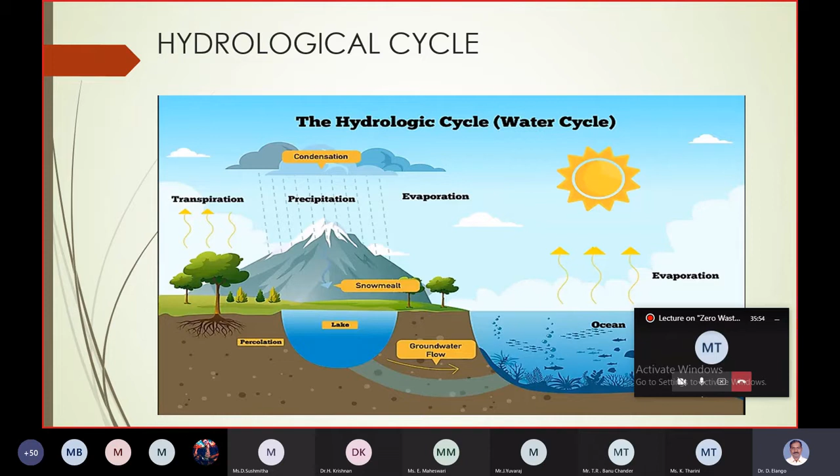But here I am going to take it as solid waste and also rainwater. In the previous slide we saw the global system, how the ecosystem is maintained globally. Now we are going to narrow down, straight away related to today's presentation - how we are going to maintain zero waste management on the household side.

Nowadays in apartments, if you go for CMDA approval for any apartment, if you construct more than 10 dwelling units or the building height is more than 10 meters, this arrangement must be provided. If this type of arrangement is not provided in the particular space, they will not give the approval.

So what is that particular arrangement? If your dwelling unit is a residential area or apartment space, definitely a large amount of solid waste will be generated - that's one stage. Secondarily, liquid waste, called wastewater, will also be generated. But this wastewater is not as highly polluted compared to industry and other sources, so you can reuse this wastewater as well as the solid waste.

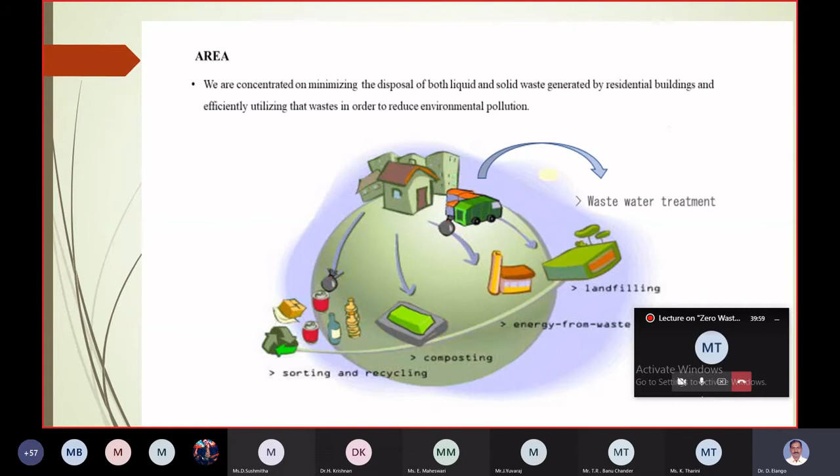Now I come back to our focused area: how residential areas, especially apartments, can achieve zero waste management. Initially I told you I'm going to focus on solid waste.

Solid waste is a material that arises from human activity - an unwanted or discarded material. For example, take a milk packet. After using the milk, the packet is wasted and discarded. That is one of the best examples of solid waste.

Right now, in most places in India, as well as in Chennai, there is open dumping - they simply throw the solid waste in open dumping areas. This was the scenario a few years ago. Now the CMDA is not permitting this type of open dumping, especially for new projects.

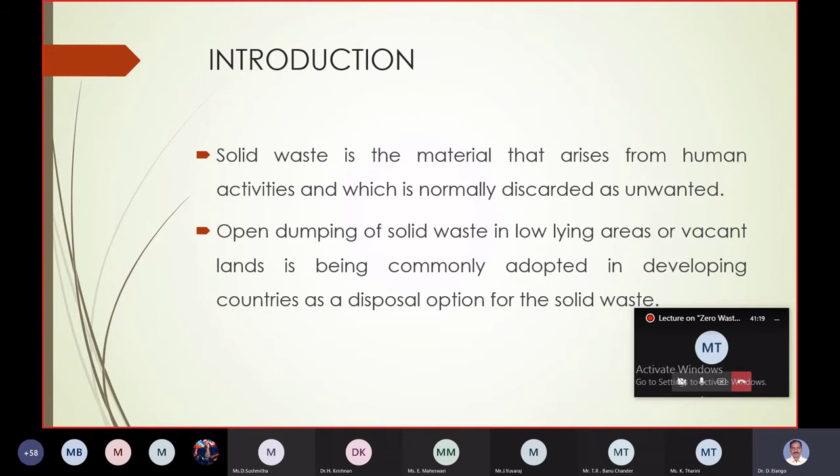Whoever is responsible for developing a project is responsible for handling this type of waste. So even if you construct any new apartments, they are responsible for controlling solid waste. Inside the apartment campus itself, they put separate places for solid waste treatment, and it is applicable to wastewater also. These two things we are going to discuss today.

What happens is, how we are going to reuse it - what is the criteria? Before you do the reuse, you have to analyze whether it will be possible or not.

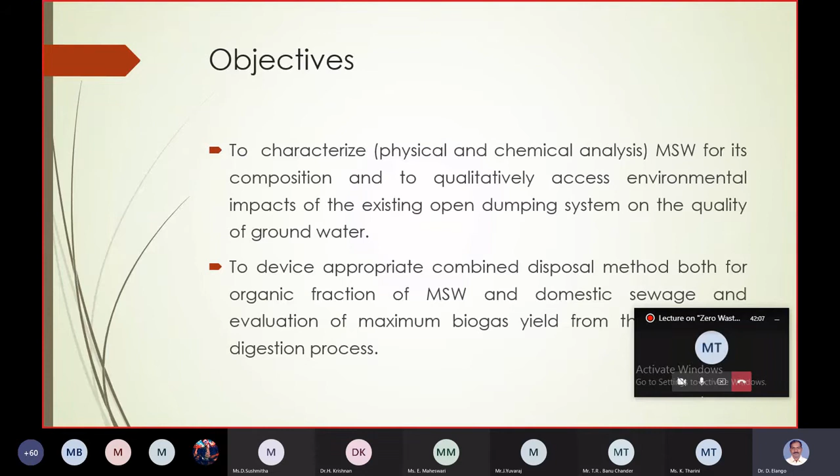The analysis means first you take the solid waste - whether the proper required quantity will be obtained or not, at least a minimum of 100 kg per day. That is the first criterion. The second one is whether the liquid waste can be treated within the campus or not. These things you can find out.

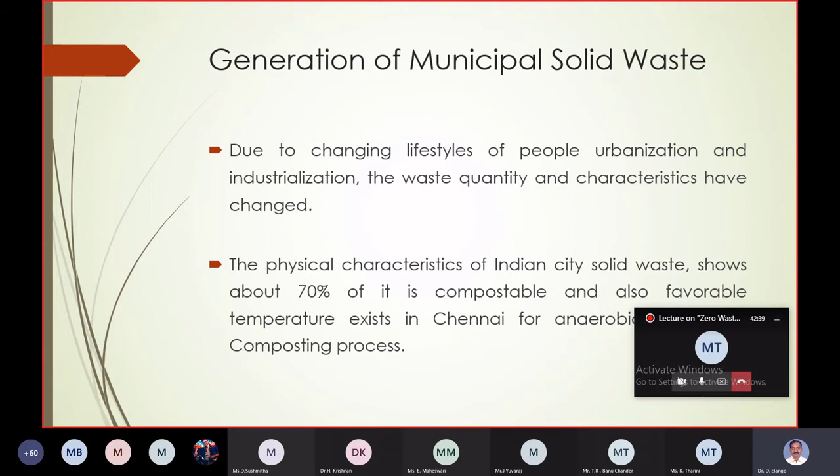In solid waste, about 70% will be compostable matter, because in residential areas mostly it's vegetable waste and food waste. Even the non-compostable plastic items will be very little compared to food and vegetable waste. That is another important aspect to consider for treatment within the campus premises.

You can send recyclables to a recycling plant. Nowadays rag pickers will directly come and take this type of waste free of cost. If you have storage area, you can store papers and metals and directly send them to the recycle plant to get revenue. This revenue can be used to maintain the apartments for routine maintenance, so there's no need to invest or give separate cost.

Other states, districts and capitals like Delhi, Calcutta, Kolkata, Bangalore, Ahmedabad are similar - organics are the most important waste component. In most cities, organic waste is almost 60%, which creates favorable conditions for composting.

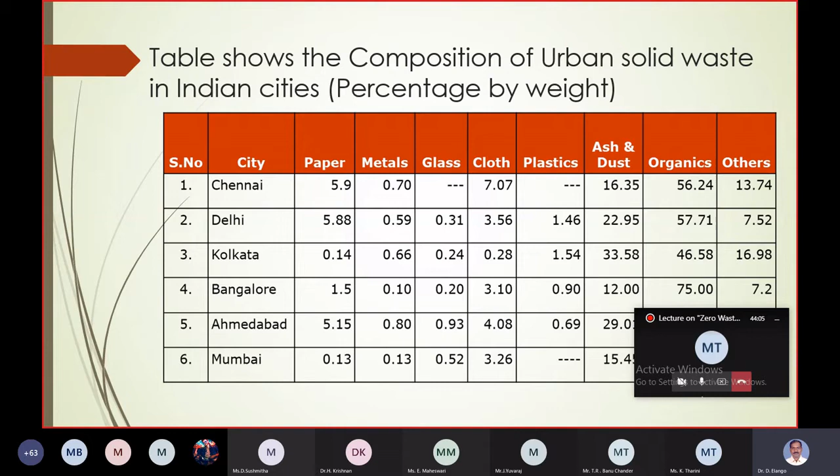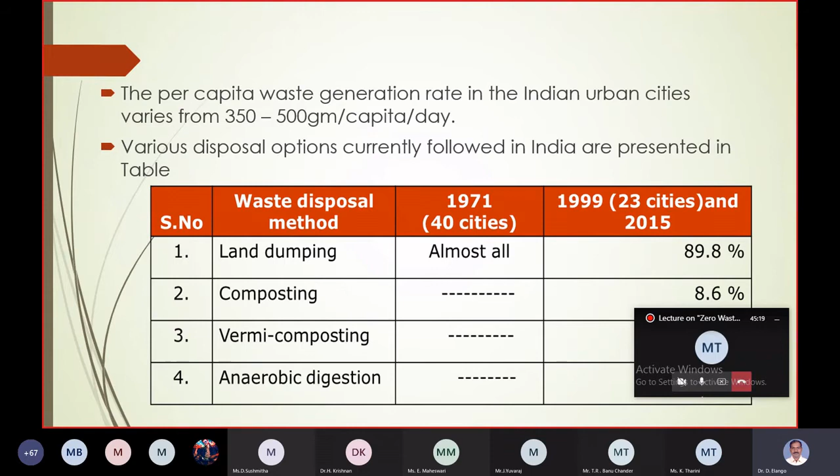So this is a general scenario in Chennai city. Chennai city nearly produces 4,800 tons per day. Of these 4,800 tons, only 3,500 tons of solid waste will be dumped in Perungudi yard, that is near Velachery, Pallikaranai area, and then Kodungaiyur yard. So it will be dumped there.

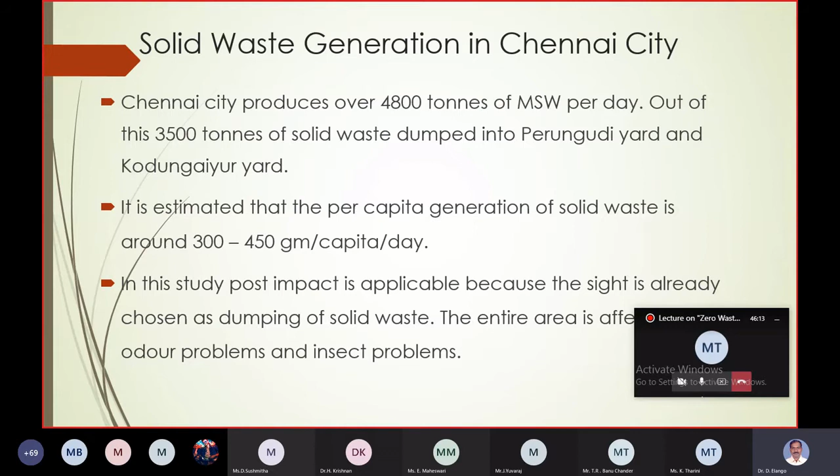Because of that huge quantity, the government is not able to handle nearly 1,000 tons. So if you minimize the solid waste produced at the apartment site, especially residential sites and multi-story buildings, these things can be managed. That's why CMD is enforcing the new system.

Here in Pallikaranai, what happens? Nearly 1 square kilometer will be affected in the groundwater, because in the Pallikaranai area, they are dumping solid waste without any treatment process.

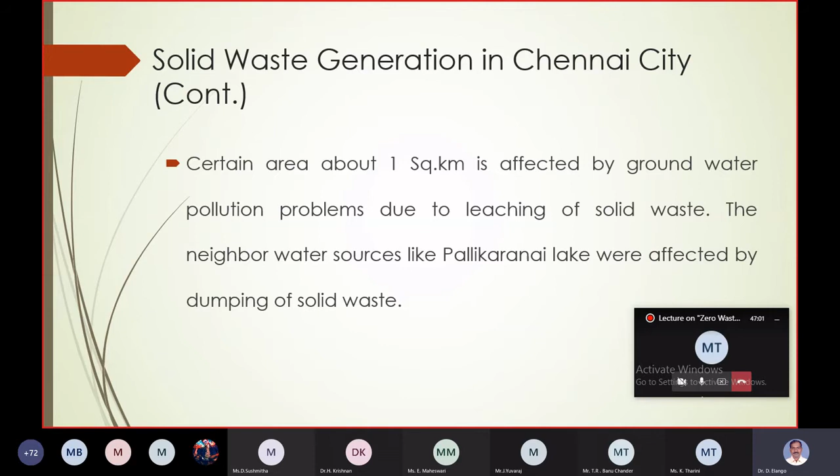So what happens due to rainy season? The rainwater will wash the solid waste material, and this water changes to wastewater. Then it goes for percolation, and finally through the leaching process, the entire groundwater will be contaminated. If you check the groundwater, especially metal items and other nitrogen compounds will be more. This is the scenario at that particular Perungudi yard.

So simply what they do is, with the help of tractors and bulldozers, they compact the solid waste. They are not doing any treatment process, they simply compact it.

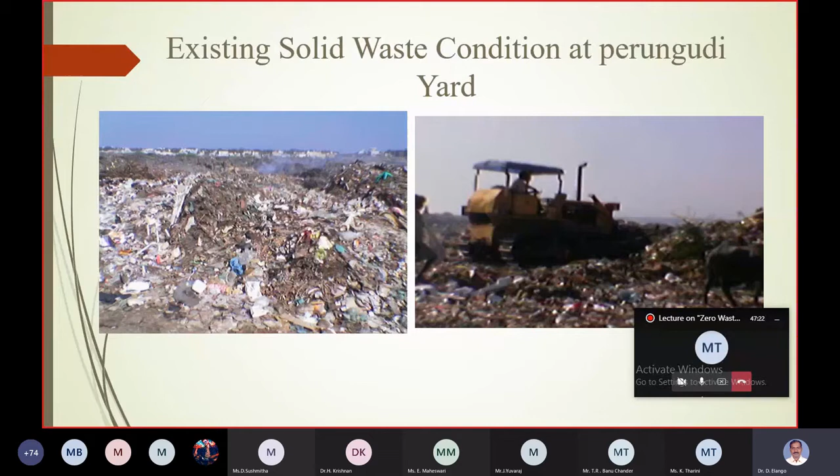So because of this, what happened? The major health issue is epidemic outbreaks, especially diseases like plague. Even now we are suffering COVID-19, the coronavirus. The same type of epidemic occurred even in the 1990s, almost year 94, 96. The plague, because of improper treatment of solid waste, was spread.

Especially Gujarat was mostly affected. Even Surat city was closed. Even the railway stations, airport, everything was closed. Slowly it spread to the surrounding places also. The same things occur in the current time also.

The next one is respiratory disease. As I showed in the previous slide, you can see large amounts of smoke and other things because of these dumps. This causes respiration problems, asthma, allergy - this type of problem.

So finally, what happened is slow poisoning. Slow poisoning means people are slowly inhaling or breathing this particular air. So finally it affects cancer and other things, especially lung problems and other issues occur.

So these are the same health hazards. Even the workers, the front-end workers also, are mainly affected.

The environmental effect, the environmental impact means, same as I told you, the groundwater - because of the leaching, the percolation of the solid waste materials is highly hazardous. Because of this percolation, the nearby groundwater table will be spoiled.

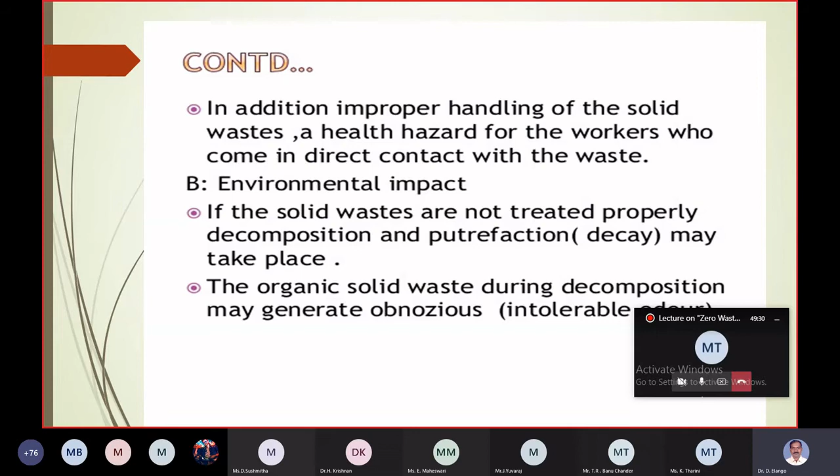Apart from that, even in rainy season, because of heavy rain, floods occur. So this waste is dumped or discharged into nearby water bodies. Especially the lake will be affected - the lake water will be spoiled. Even the river - if the stream reaches the river, the river water will be spoiled. So this type of environmental impact is also there.

This is the collection system followed in Chennai city. I think most of us see this type of thing, the big truck will come and collect that particular container. With help of the hydraulic effect, they transfer all the waste to the truck.

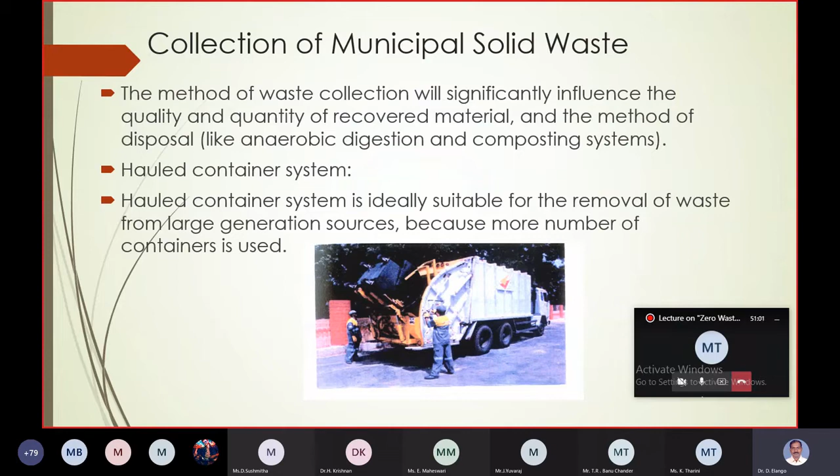After transfer, the solid waste collected in the truck will be compacted and stored in the front area. This is normal routine work. This type of collection system is called the hauled container system, where the container size is smaller and placed at the corner of the road, and at a particular interval the truck comes and collects it.

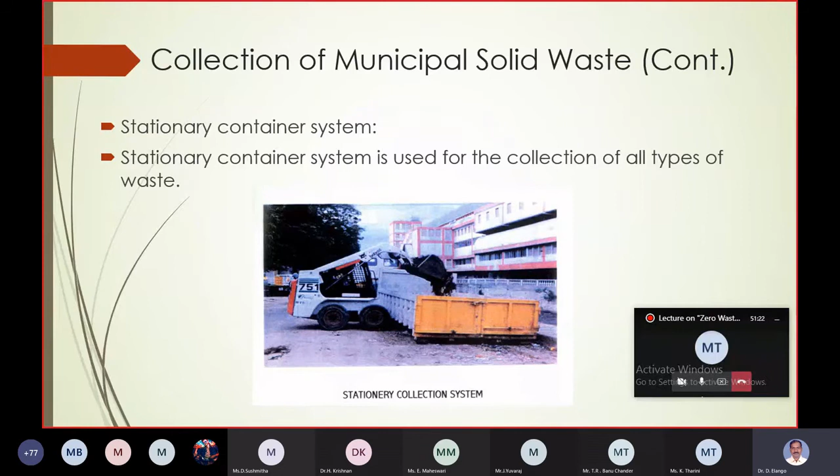This is the stationary container system. Wherever huge space is available, and also a large amount of waste is generated, they use the stationary container system. Here the size is larger, so you can store more quantity of waste, and then it is disposed in the dumping yard.

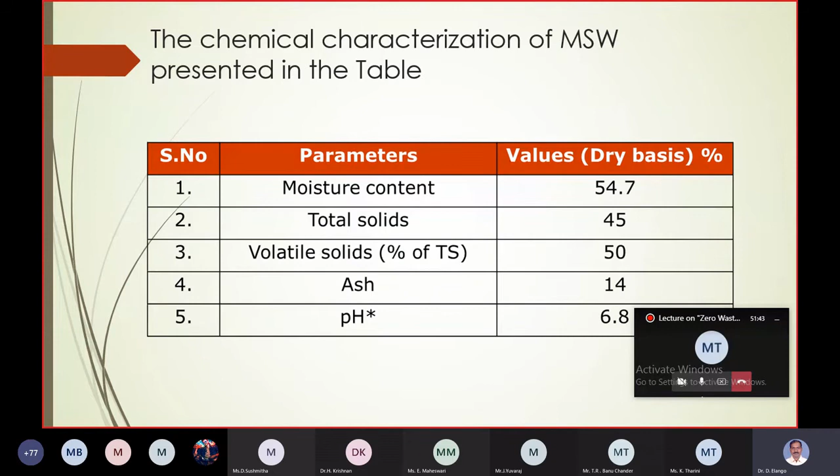This is another favorable condition for our solid waste: moisture content will be 54%, which is the most important one, and it is required. Total solids 45%, volatile solids, ash content, and pH will be 6.8. Between 6 to 7.5 is favorable.

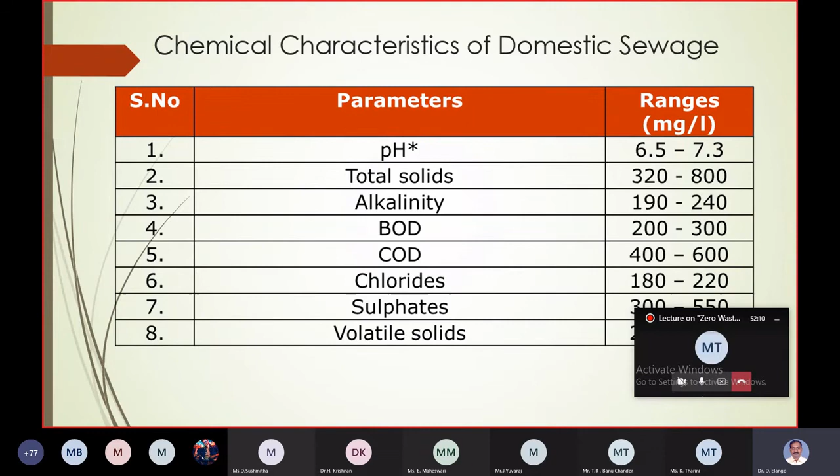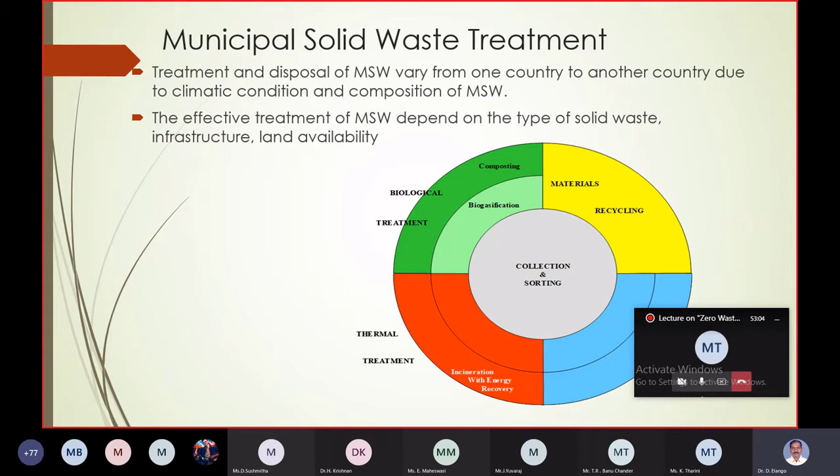These are the treatment options: the aerobic process, meaning composting. Nowadays everybody talks about roof gardening, and for roof gardening we can use the composting material.

Another one is the anaerobic process. With help of the anaerobic process, we can produce biogas. For example, the gobar gas plant, which is very popular in rural areas, especially villages. They use the gobar gas plant, which is one of the anaerobic processes, producing biogas.

Under incineration, you can get energy for electricity conversion. Everybody asks why not convert municipal solid waste to electricity - that process is called the incineration process. Then there's land filling: wherever you find a low level area, you can use it as a land filling area.

For example, take the Velachery and Taramani area. In the 1980s and beginning of 1990s, it was one of the low level areas, so in the 1990s that area became one of the dumping yards.

All the city waste will be dumped in the Taramani area and then Velachery area. After the land undergoes processing, the land level will be increased and becomes valuable land. So this type of waste dumping can convert the land into valuable land. Even going for foundation work in this area is very challenging, especially Taramani and Velachery, because 25 years back these areas were dumping places.

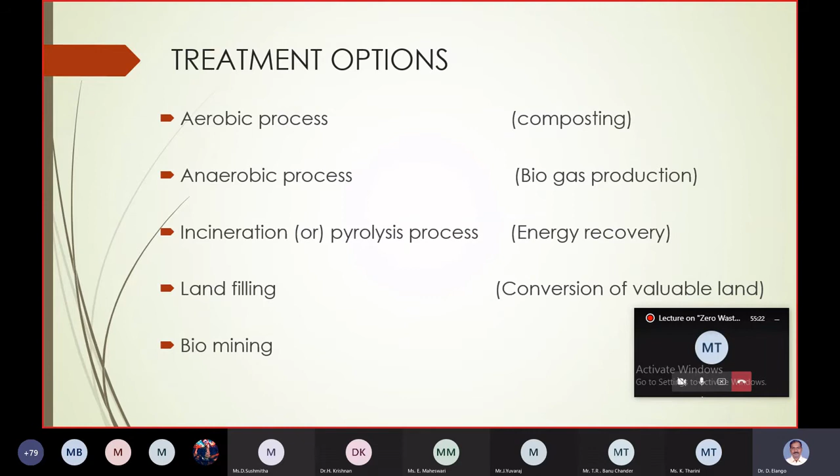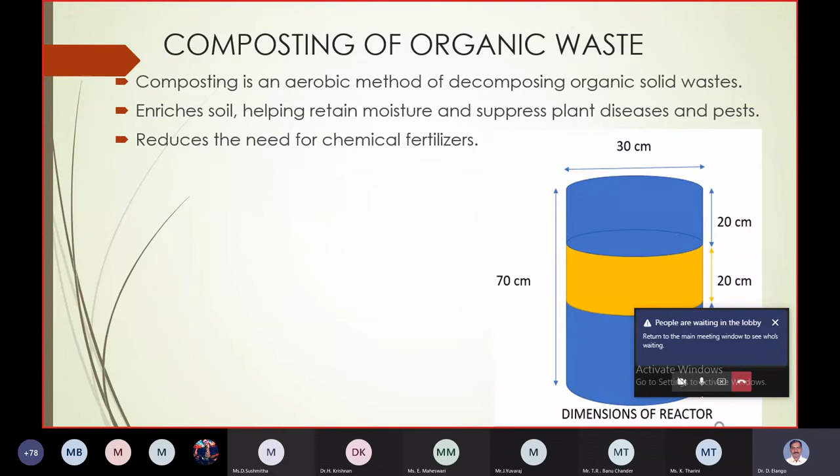This is a simple setup that one of our students used for a project in our campus last year - composting of organic waste. This is a simple cylinder, 70 centimeters in height, and it's even available ready-made in hardware shops. I will show the real picture so you can understand. With the help of this, even individual families are developing and generating fertilizer, that is manure, from this source.

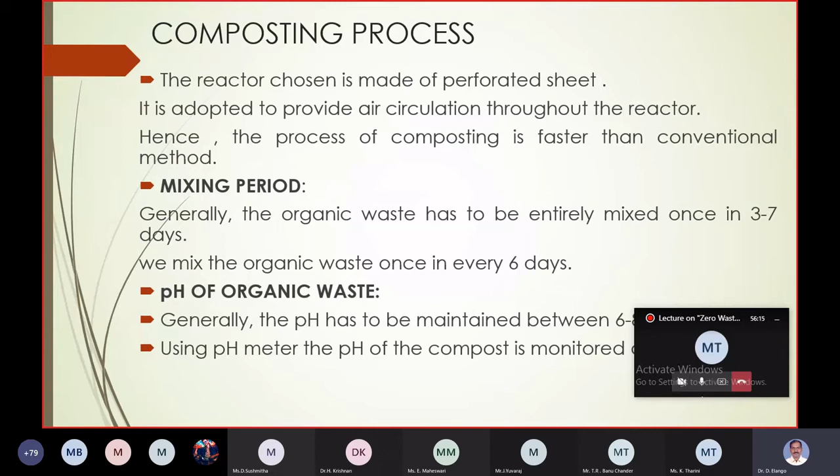In this composting process, these are the main things: you have to properly mix it over 3 to 7 days, and maintain the pH between 6 to 8. The temperature should be 32 to 60 degrees centigrade - this is the normal temperature available in our area, meaning our environmental condition. Since this work is carried out in our campus, it's possible to measure the temperatures with thermometers.

And then the EM solution - this is most important. That is the effective microorganism solution, called EM solution. Why am I using EM solution? Normally the composting process takes more than a month, nearly 60 days. We don't want to wait 60 days, so we are going to reduce the time period - instead of 60 days, we concentrate on 15 to 30 days. That's why we use the EM solutions.

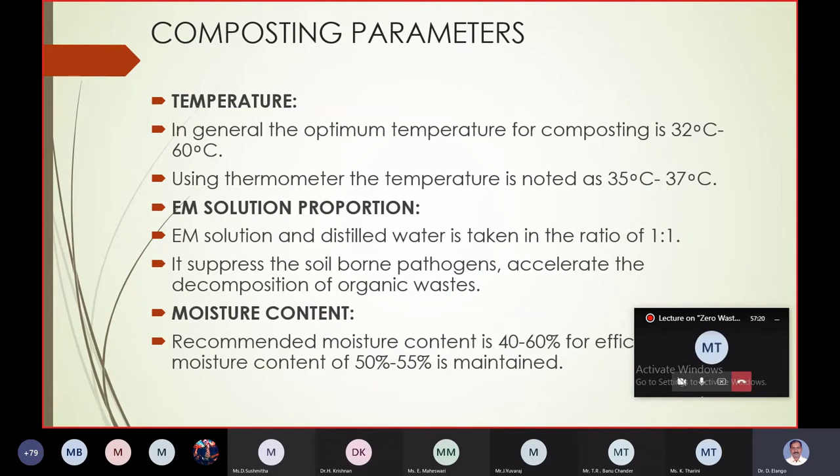Through the period, we maintain the moisture content at 40 to 60%. Of course, the moisture content already available in the waste will be 50 to 55%, so that is enough - no need to take care separately. So these are the cylinders, the setup - we call it a reactor. That is the correct technical term, but locally they call the cylinders and other things vessels.

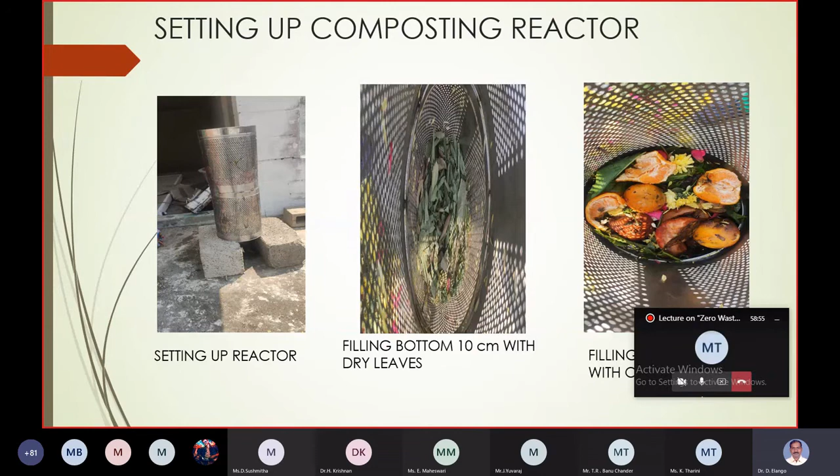What happens is, in this cylinder on the left, the height is around nearly 1 meter, with a diameter of 30. So in this we are dumping almost 20 to 30 kg of waste. We arrange it layer by layer, and for each layer we spread this EM solution. The entire waste volume will be reduced to one-fourth - meaning 20 kg will be reduced to 5 kg of composting material, which we can use as natural fertilizer with high fertile values.

This is a system followed in most apartments, even on a small scale. Even individual families follow this particular system. They can generate at least 5 kg of natural fertilizer manure once a month.

You can use the roof garden and other places to concentrate vegetation and similar things. Even small vegetables like ladies' fingers, brinjal and others can be grown this way, with no need to use artificial fertilizer.

The same thing applies if you come to the apartment side or multi-story building setting, it will be a must there. The dimensions are larger. The same concept is applied, but the reactor size is more, around 2 by 2 by 2 meters.

At a time they dump 100 to 200 kg. There are many compartments for this, and they are used accordingly.

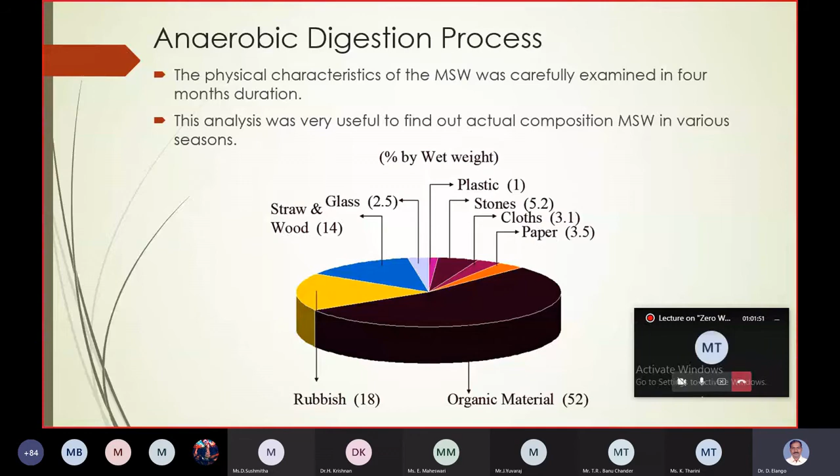Next I'm going to concentrate on anaerobic digestion. Anaerobic digestion means the same thing, where composting is one of the processes involved.

Before composting, what I do is collect the organic solid waste in dry form. That is, vegetables and food waste are collected and placed in sunlight to make it dry. Then we apply the shredding process to reduce the size, to about 2 to 4 mm.

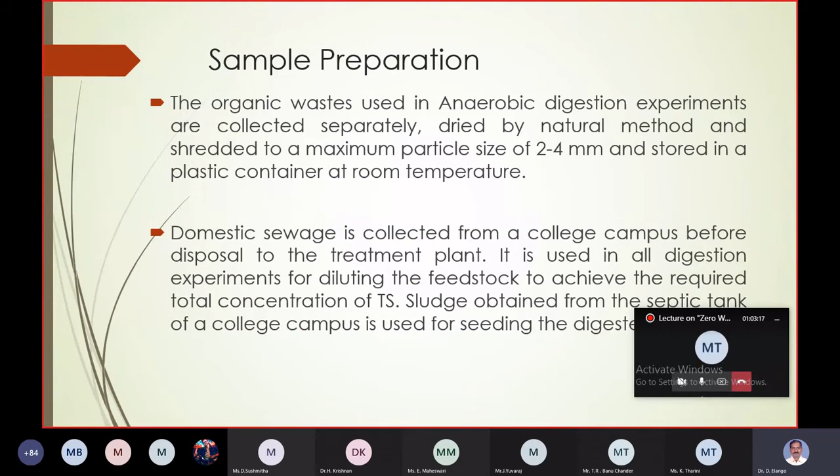To avoid this, what I do is collect the untreated wastewater mixed with shredded solid waste. When mixed with the shredded solid waste, gas is produced, which is called biogas.

So here it's a portable one, 5 liter capacity. What happens if you pour this one? Initially, I feed the bacteria, especially the anaerobic bacteria, using sludge collected from the septic tank, which is also one of the hazardous wastes. So the septic tank sludge is initially fed into the digester, then I feed the shredded solid waste along with untreated domestic wastewater.

So after 2 weeks, 20 days, what happens? The gas will be produced. This gas is called methane gas, and it can be used for the cooking process. This is a simple setup we did 2 years back in our college.

It successfully ran, and the same type of plant is operated at the SRM University nearby treatment plant, running the biogas plant separately. It was installed, but now because of maintenance problems it is not working. That is the main problem for biogas plants. The maintenance is a major issue; this is a highly sensitive system. Even if the digester is not properly maintained, the entire system will be spoiled.

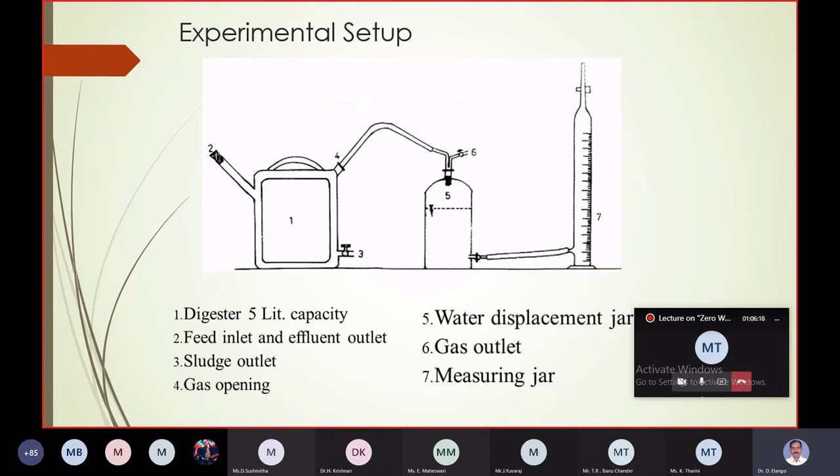Here only 20 to 30% of the waste is handled. Still 70% of the waste is handed over to the Chennai Corporation. The 30% is maintained because of space availability, and cost is also an important factor.

So here, in the entire period we maintain the temperature at 26 to 36 degrees centigrade, and the pH will be 6.5 to 7.5. This is highly sensitive; even if any failure occurs, suddenly the total system will be spoiled.

Previously we studied one more process, the composting process. This biogas process is entirely different from the composting process.

So after successfully running this plant, we get the biogas, which is methane, almost 68 to 72%. More than 70% of the gas is developed in the reactors. The same concept is used in the Gobar gas plants installed in most villages about 5 years back, where subsidies were given to particular villages, especially individual families.

They are given this because in villages most organic materials are available, like cow dung and leaves, which are waste materials. With the help of this waste material, they develop this gas, and so this biogas is produced.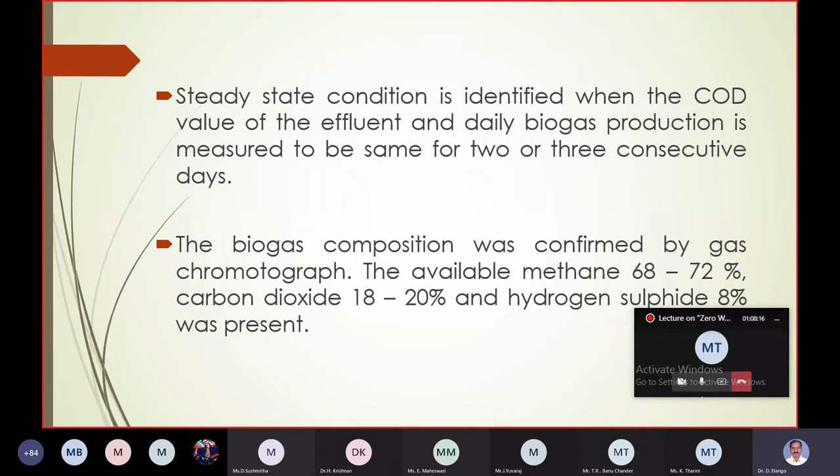The main drawback for this biogas, that is methane gas, is that this plant does not operate throughout the year. In the rainy season the temperature drops, and once the temperature drops, the pH level rises, so the reactor is not able to produce gas. It means the methanogenic bacteria become ineffective. So throughout the year the plant does not operate successfully; at least 3 months it must be shut down, which involves a huge cost. That is one of the main drawbacks of operating this type of biogas plant.

Again we come back to our apartment, a high-rise, multi-story building in a residential area. We are concentrating the solid waste with the help of reactors, especially bio EM solutions, and vessel type units. We have successfully handled the solid waste and developed manure, natural fertilizer, which can be used for roof gardening and the apartment garden and lawn maintenance, so there's no need to purchase fertilizer separately.

Next we can concentrate on wastewater, that is untreated wastewater. As I told you, compared to industries and other waste types, the wastewater arising from residential areas, especially apartments, is much less hazardous. Even metals and other hazardous materials will not occur, so by applying a simple process you can treat and reuse it.

Normally pH, turbidity, and color are the main criteria here. We developed a small experimental setup at lab scale, and we successfully operated it. We took a small vessel and fixed three layers inside it.

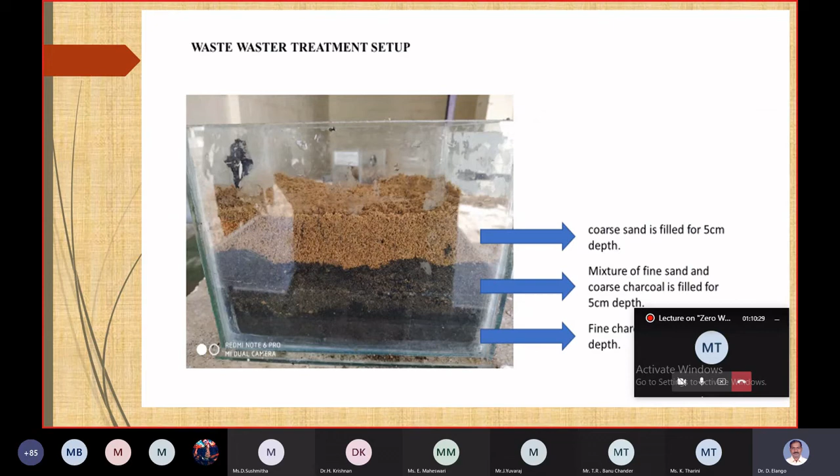This treated water can be used for the same gardening purpose, so there's no need to use potable water. It can also be used for flushing in toilets. Most apartments install separate pipelines during construction for the flushing area so this reused water can be supplied there.

Apartments nowadays depend on water from the government, corporation, local body, or buy water separately, spending around 1,000 to 2,000 rupees per tanker. With this small treatment system, these costs are minimized, and almost 30% of the water can be saved.

Nowadays it's mandatory to install such systems, especially for solid waste and liquid waste treatment and reuse. We have to show this type of drawing and plan, and only then does the government or CMDA give approval for high-rise buildings.